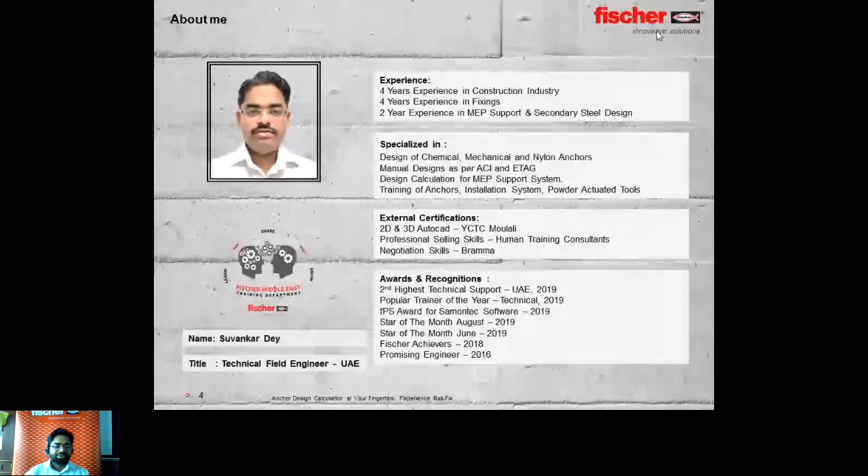So today, what will be our journey? Basically, there are two segments of the journey. One is the basic segment of rail fix. We'll discuss elaborately, and there will be another about the CFIX. Also, we will discuss elaborately regarding that.

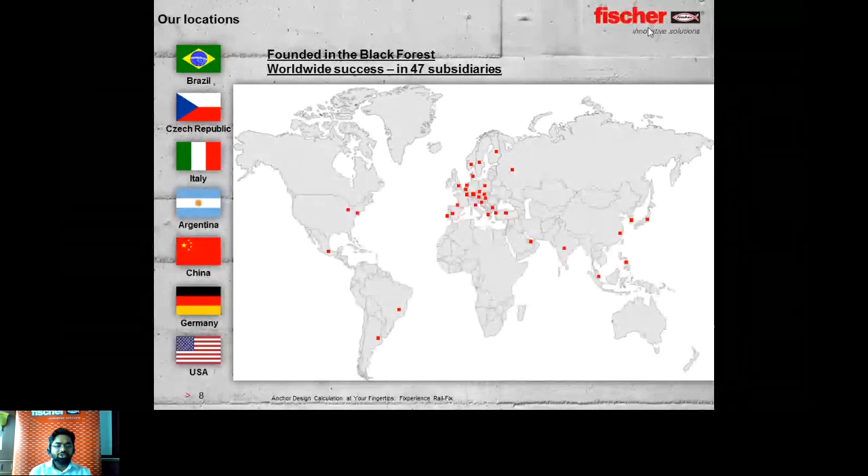Our manufacturing locations are Brazil, Czech Republic, Italy, Argentina, China, Germany, and USA. We are in 47 subsidiaries worldwide, spreading the success over the world now. What are the divisions of Fischer? Fischer has the fixing division, where we work as Fischer fixing. We have automotive systems. We have Fischer Technik, Fischer Consulting, and LNT Automation, also with Fischer.

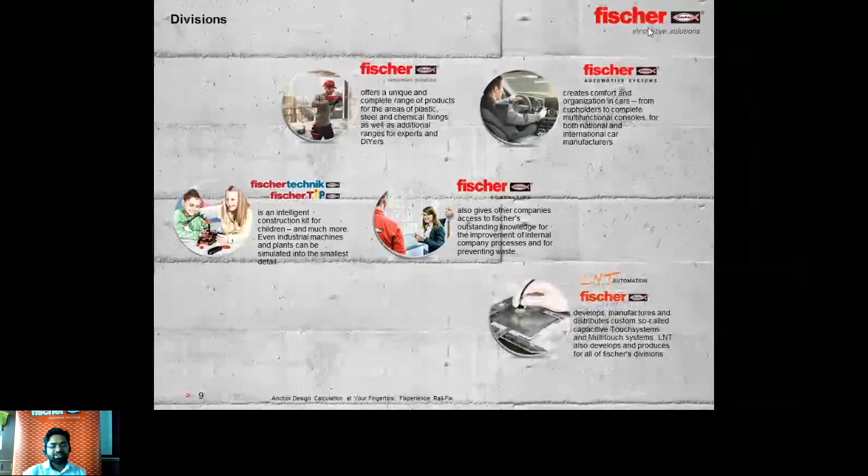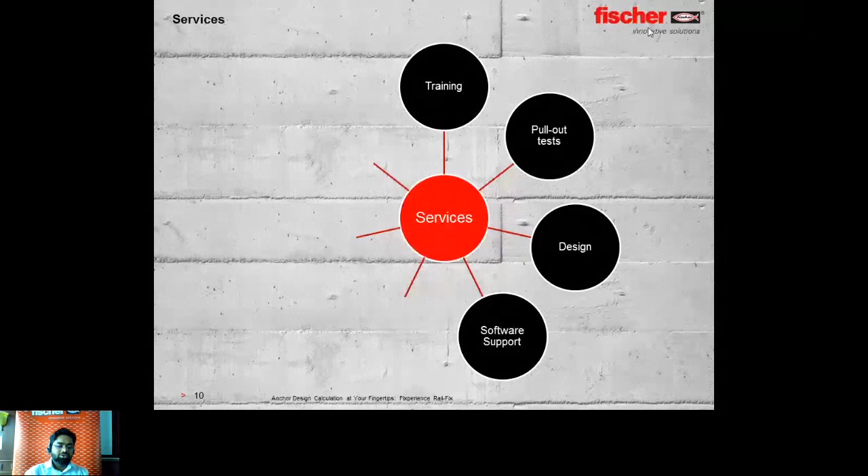Now, about the services, I also want to introduce you. Fischer is not only selling the product, we are also giving training. So if you need training at your offices, or you need any development in your knowledge, we can help you out with trainings about anchors. We also do pull-out tests on site. Design calculation and software support is also given by us. Document support is there, international technical support, as well as project references for you.

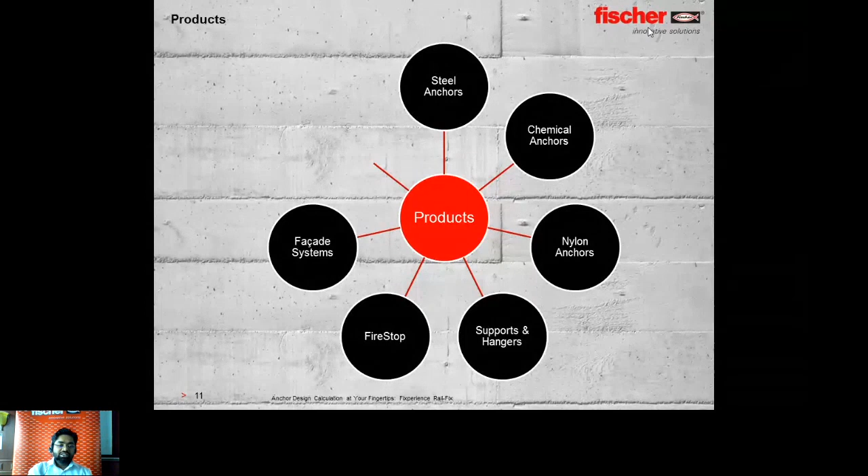So once you click on rail fix, you will find software like this. Today our discussion will be on rail fix and later on CFix. If you see rail fix, it's a user-friendly interface, and towards the left side you will find a toolbox. So how to start the design? You just have to go step by step on the left side, and your design will be done through to the print preview.

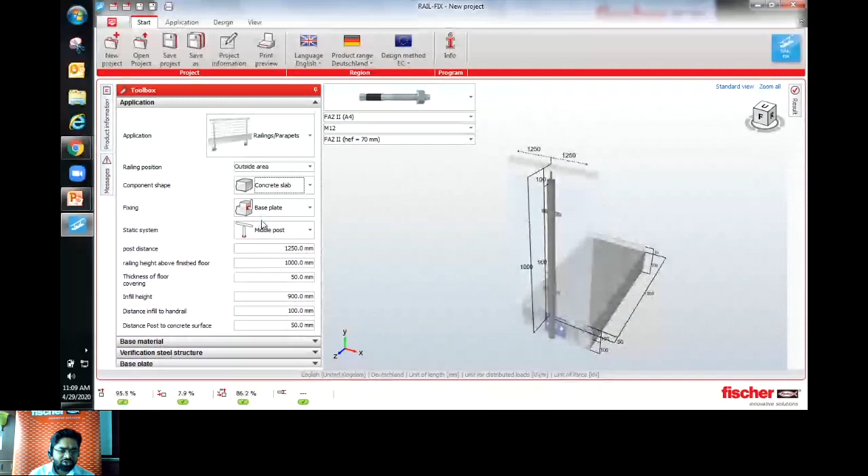What is the component shape? Sometimes at the site you will find they are fixing on the slab, sometimes they have an upstand. So if you do have an upstand, you can choose it. If you don't have the upstand, then go for the concrete slab. Today my example is with the concrete slab.

Fixing is the base plate. How the base plate is fixed, on the face of the slab or on the top of the slab, can also be defined here. I will choose on the top of the slab, and the next part is the static system.

For the post there are different options available in the software: single span element, two span element, multiple span element, and middle post. Middle post is always the worst case, as you know. Single span or two span element can also be chosen based on your requirement. As middle post is the worst case, I'm choosing middle post.

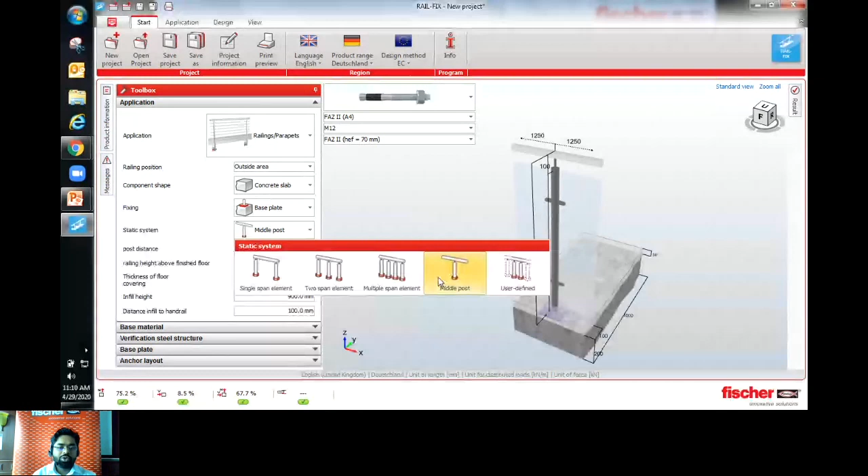What is the distance between the posts? From post to post, what is the spacing? I have the post to post spacing as 1250 mm, so 1.25 meter, let's say. Railing height above finish floor: how much is the height of the railing?

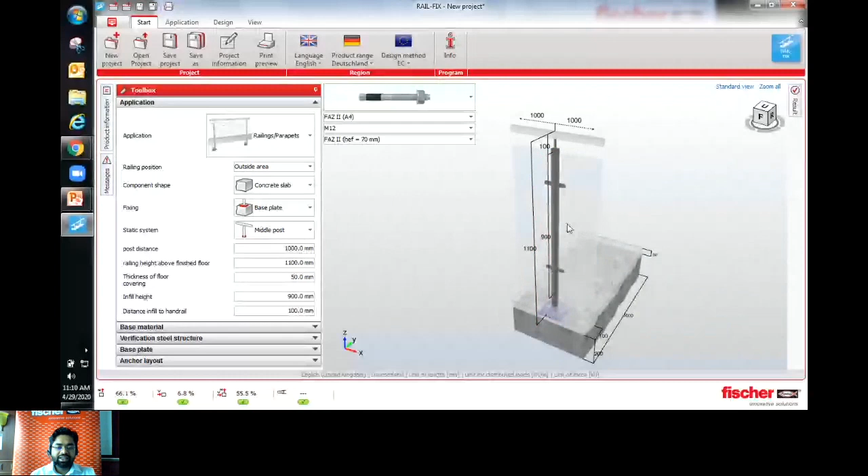By the way, you can directly input the values on the user interface, in the model itself. Let's say I have 1100 mm height, and then how much is the height of the infill? It is 900 mm here, or you can choose from here also. I'll make it 1000 mm. Here you also have the option for the distance from the top of the infill to the top of the rail. All these options are basically architectural requirements, so based on the drawing you can fill this data.

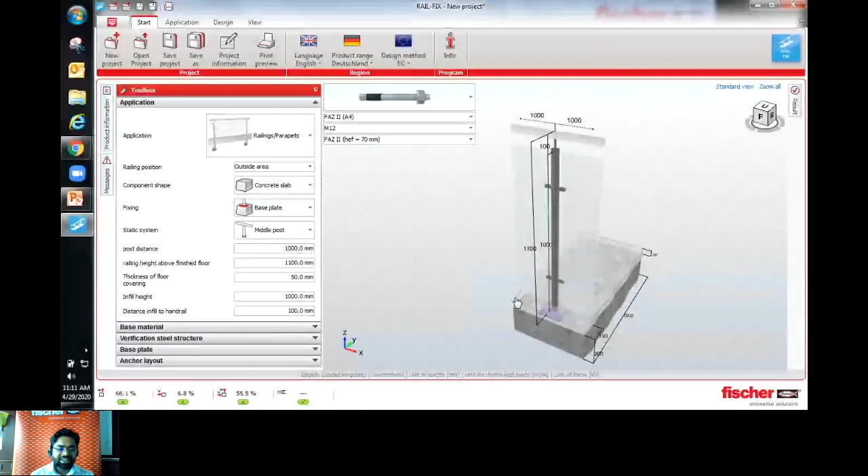Once you finish the modeling, we can come to the base material. What is the base material made of? Is it cracked or non-cracked? Case to case, we can choose cracked or non-cracked concrete. Grade of concrete: which grade of concrete you have. Surface reinforcement: whether we have surface reinforcement or not. That's the information regarding the base material. Once we choose the base material, we are good to go for the base plate.

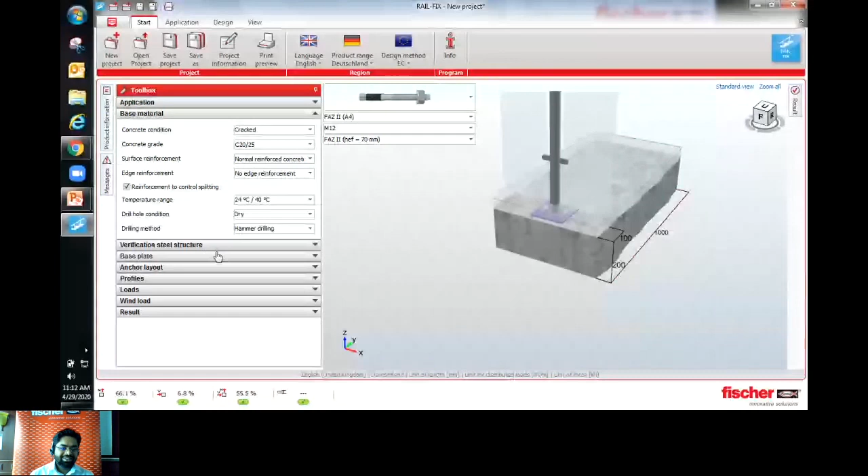Did I miss something? Verification of the steel structure. We will come to the verification of the steel structure once we finish the modeling.

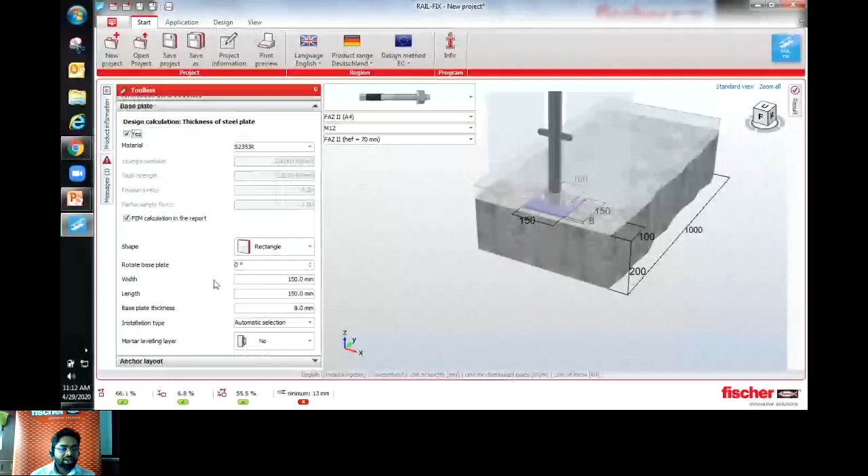Now, the base plate: what does it look like? Is it rectangular, circular, elliptical? If you have a rectangular base plate, you can choose the rectangular base plate here. Here as well, there is a checkbox asking whether FEM calculation, design calculation for the base plate, is required or not. You can include the FEM calculation in the report by ticking the box.

Okay, let's come down here. What is the size of the base plate? It's 150 by 150 now. Whatever size is required for you, you can choose it, and then you're good to go. For the base plate thickness, you can see at the bottom it's saying we need 13 mm of base plate. So I will just change it to 13 mm, and it's showing green again. If it is red, it means it is overutilized. It always has to be in the green zone.

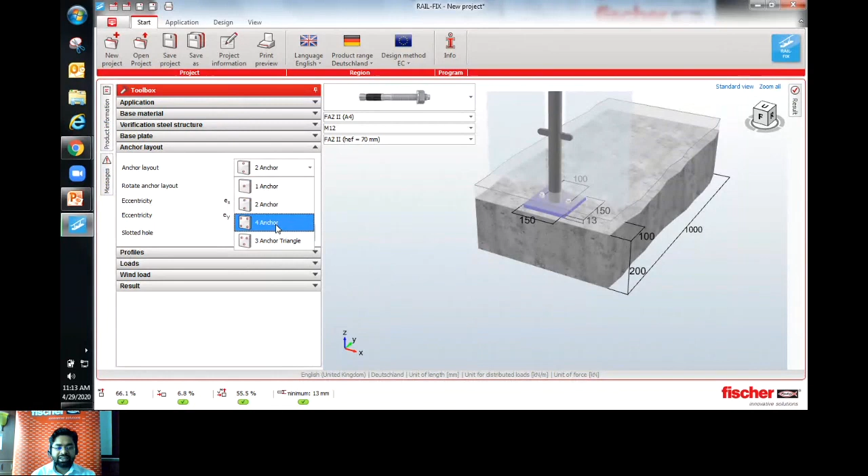So what is the anchor layout? Anchor layout is how many anchors you are putting. It's 4 anchor, 2 anchor, 3 anchor in a triangle, etc. I'm putting, let's say, 4 anchors here. If we are putting 4 anchors, it's saying the edge distance is not sufficient. You can see here, basically we do have edge distance, let's say in the side as like 100 mm from the center of the anchor. I can put it directly here.

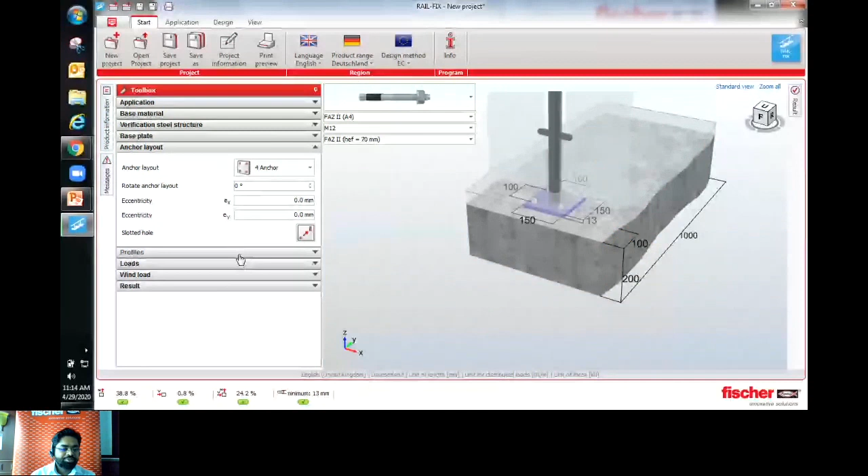Now coming down to the profile, how the profile looks like. We can ignore this part because when we do the verification of the steel structure, we can directly do the calculation from there. It will choose the profile from there. Now coming down to the load, there is option as free input, and the loads are mentioned here. So you can put the unfactored load without safety factor. It will take the safety factor automatically and then do the design calculation.

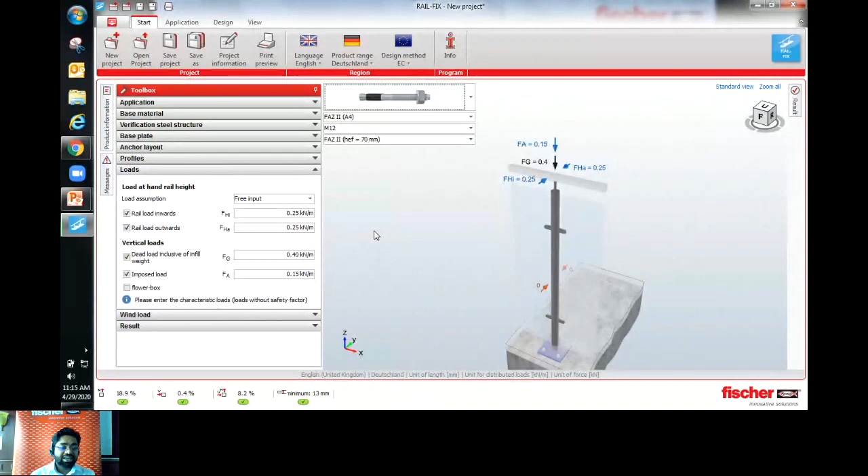So let's say I am having load here as inwards load 0.25 kilonewton, outwards 0.25 kilonewton. FG is basically denoting the dead load of the infill. So here, let's say I am having 0.2 kilonewton, and here it's imposed load. How much is the imposed load? 0.2 again, let's say for me. So this is an example I'm trying to make, and this is how it's coming.

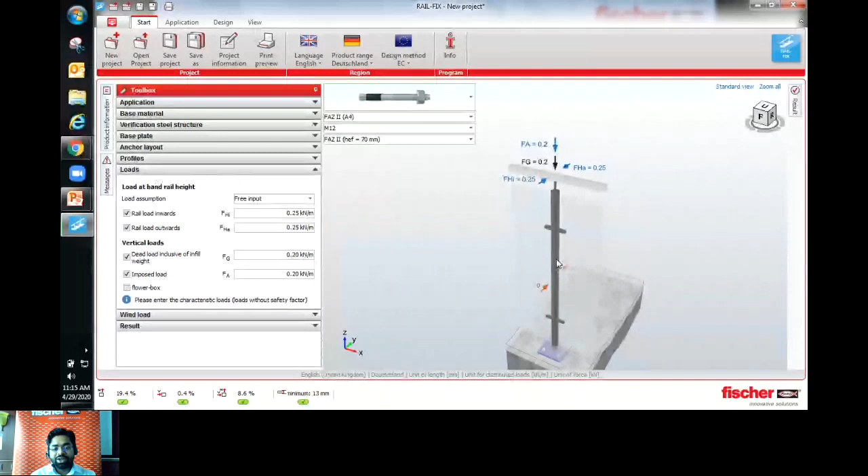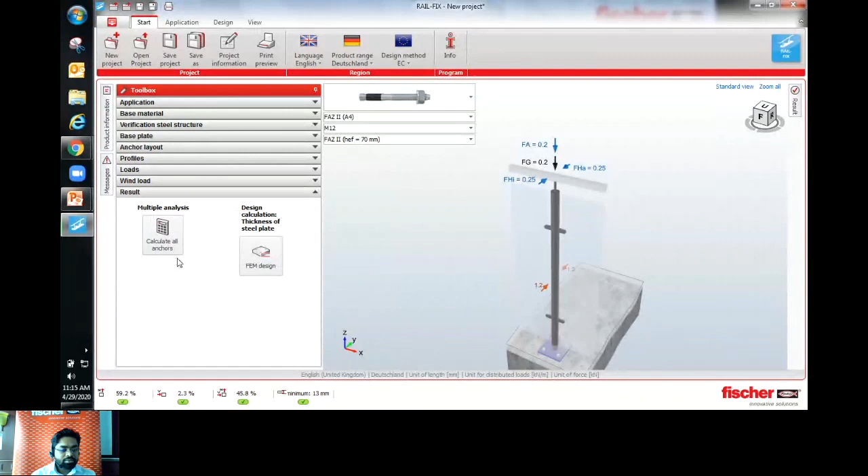Now going to the wind load, we can include the wind load as well as a free input. How much kilonewton per metre square is the wind pressure? So I can put 1.2 kilonewton per metre square in both directions, and good to go for the result. Now there is one thing called FEM design, which is doing the design check for the FEM, finite element. So we can check the finite element from here.

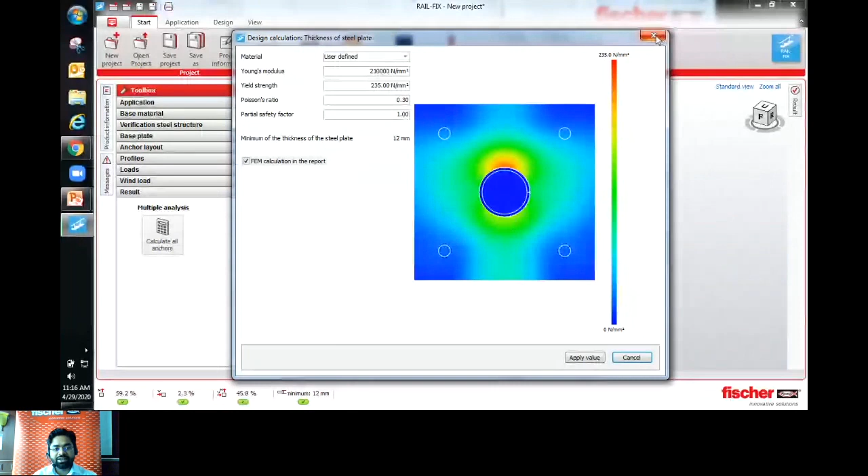What is the grade of steel mentioned here? You can mention it as user defined if it is aluminium or some other material apart from steel. Once we define this, we can do the check here saying how much is the thickness required. It's 12 mm. Apply the value. So now our plate thickness is 12 mm.

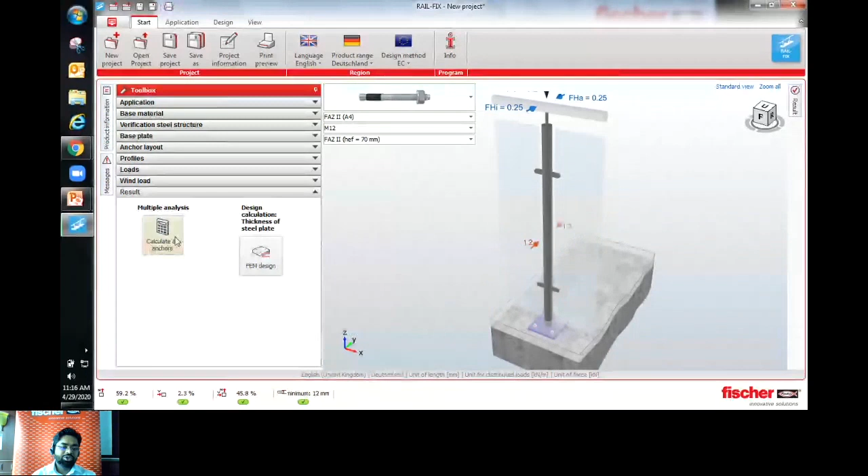Great. So now the question I saw, how to calculate all the anchors. There is an option. We can choose the anchors from here, but I prefer to choose the anchor from multiple analysis. So if I click here, in a single click, you will get the list of anchors that will pass for this particular design calculation. Just to give some time, it's having 743 anchors passing for this particular case, and it will give the whole list of anchors that are passing.

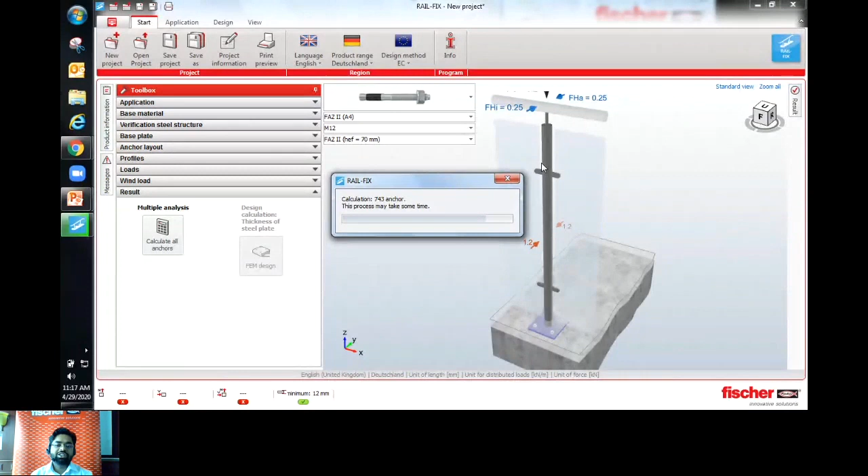I saw one of the questions here. Which load are we talking of here? Basically, we are talking about the loads: what are the live loads, the imposed loads, as well as the dead load of the handrails. It always has certain values from project to project, based on the specification, and how much wind load is there, because it's an outside application as well.

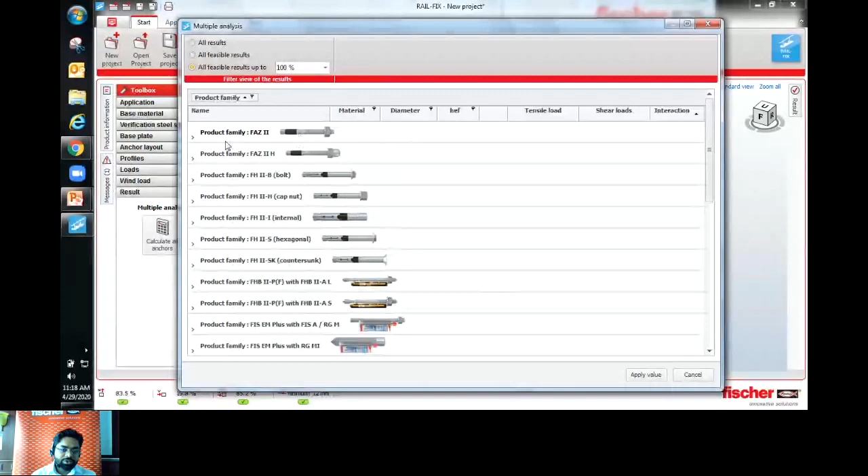Here you will see the whole list of possible anchor solutions. Now it came, so these are the anchors that all pass. I will also tell you today how to do the economic anchor design based on this list. So let's choose one for the time being to make the report, and later on we can come back to how to choose the economic anchor. So now this anchor is FAZ II M10. Great.

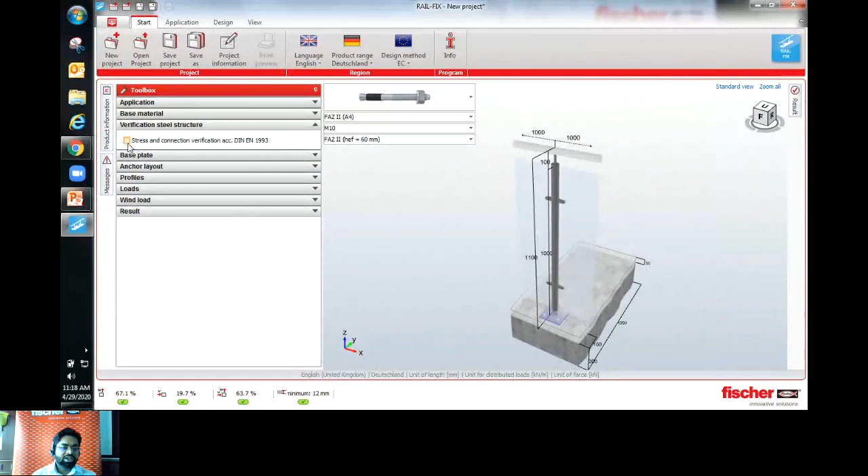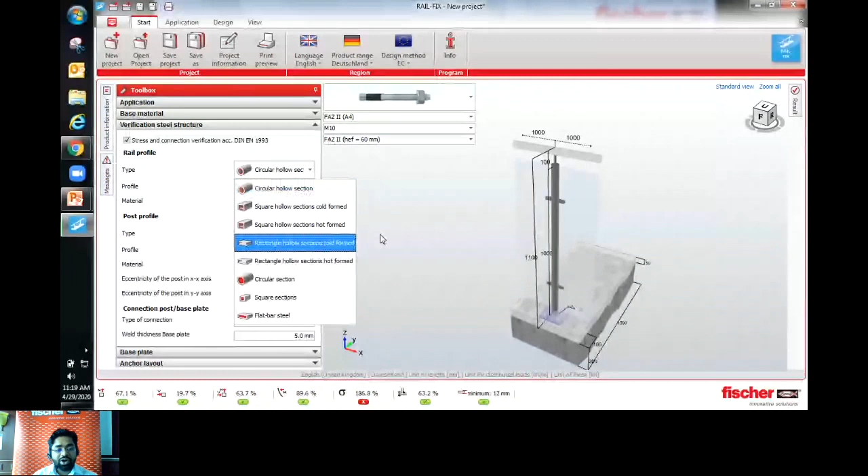Now we talk about verification of the steel structure. To do the verification of the steel structure, we just need to click on this, and it will do the verification of the post and the handrail. How the rail looks like: a circular section, a square hollow section, or a rectangular profile, we can choose. I'm choosing the rail as a circular section, but the post as hollow section. Once we choose the hollow section, I can also choose its size.

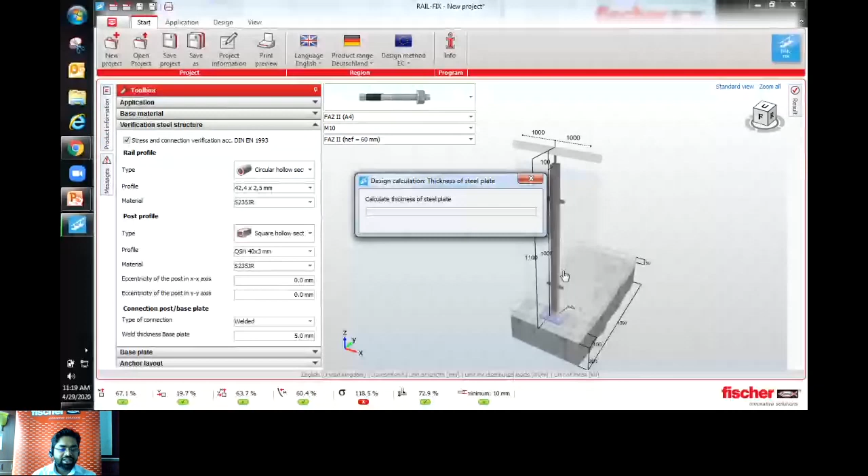Let's say 40. And not only the post and the rail, it's also checking the welding connection. Here you can see the stress is coming much higher. In the stress analysis, the square hollow section 40/3 is not passing. We have to go for a bigger section. 40/4 is passing with exactly 99.6% utilization, you can see. Now it's safe to go. The welded connection is a 5 mm weld with 72% utilization, so good to go.

Here now the print preview is coming. If we click on the print preview, it will give the report. So let's see how the report looks like.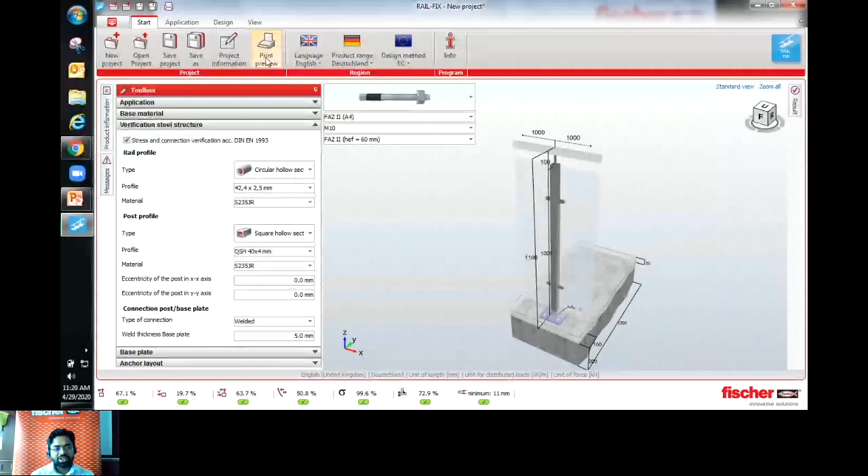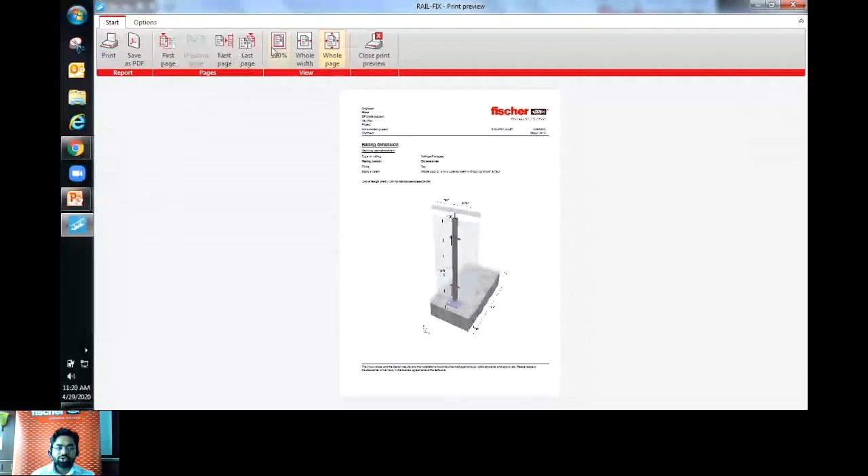Mr. Rajai, I see you wrote how to calculate shear force. Basically, the shear force is calculated by the software itself, so that's why you don't have to consider any. You don't have to do the calculation in any structural software. You can do it in this software and then find it. I will show you how the report looks like. Maybe it will be easier, and then it will answer your question.

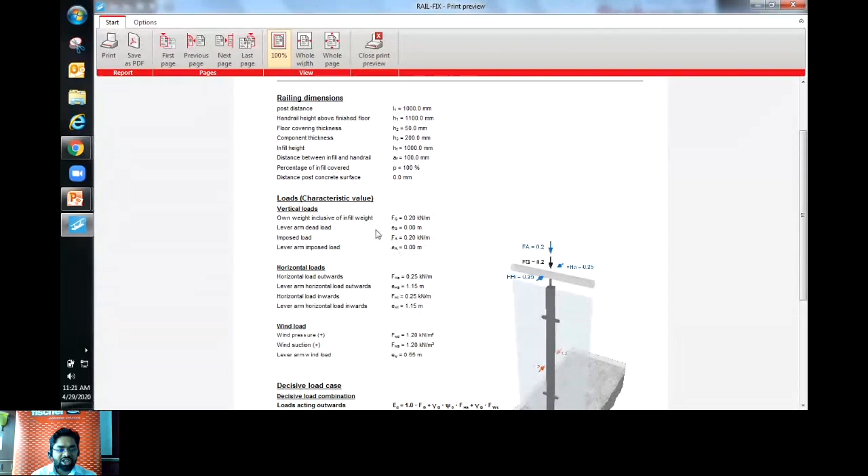So this is how it looks like, it's the basic view of our handrail design. Here, the railing dimension and the post dimension have been mentioned. What loads have been considered is also mentioned. Now, based on that, the decisive load case has been considered. So for the deflection, all values are with 1 times safety factor, and then you can see the load combinations.

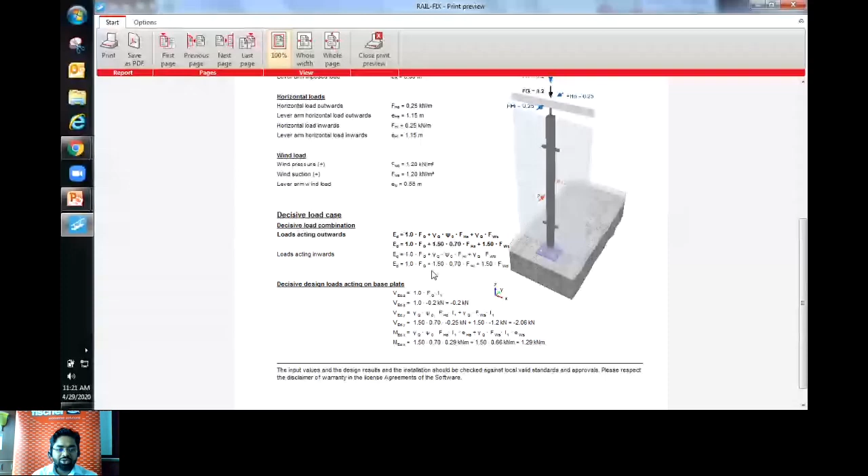Here, the decisive load design is acting on the base plate based on this load combination, and how we are getting the shear load, tension load, bending moments, everything on the base plate. So at the beginning, we did the check for the rail profile and post profile. It has also been chosen, and after that there will be the verification.

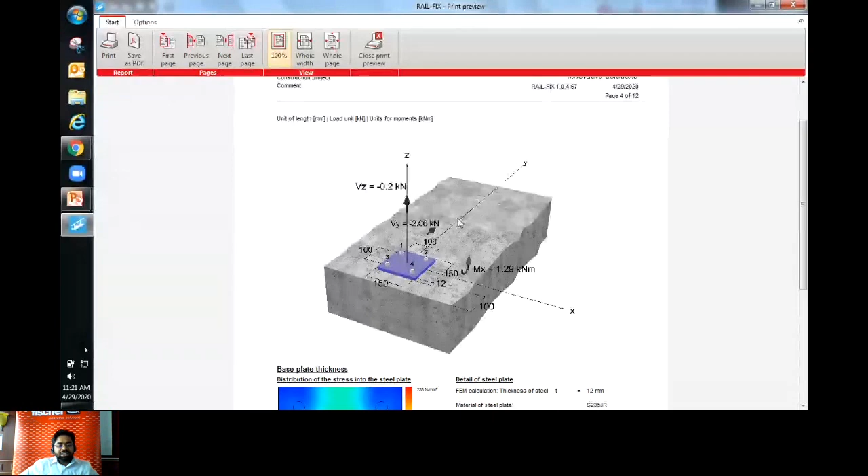So now the anchor design is there. There is the FEM analysis for the base plate. There is the anchor, how much maximum tension force is working on the anchor, and based on that the detailed analysis of the anchor is given.

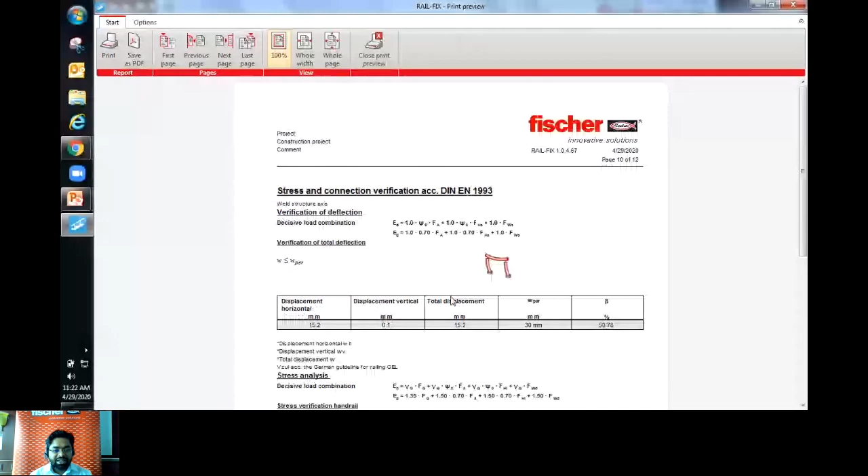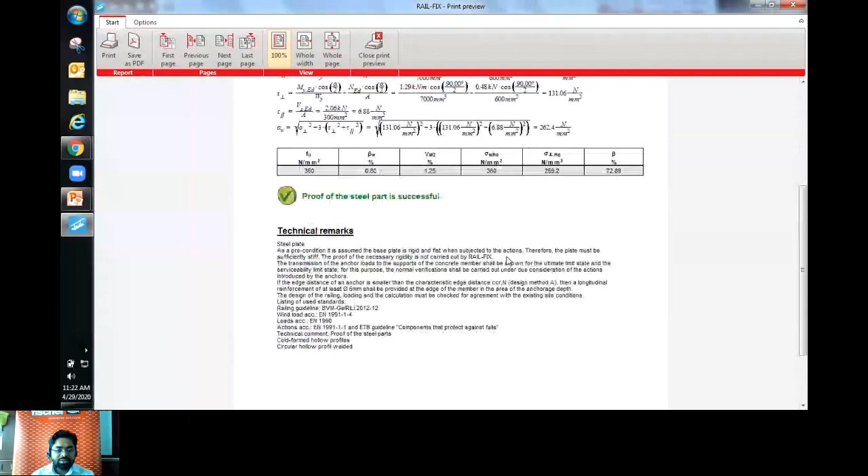Now in the second part you will find the verification of the deflection for the rails as well as for the post. So here the decisive case has been taken again, and then the deflection has been checked and the stress as well. So after this calculation, it's saying proof of the steel part is also successful, and this is the end of the report, you can say. So this is how the report looks like after doing the calculation in RAIL-FIX for the handrails.

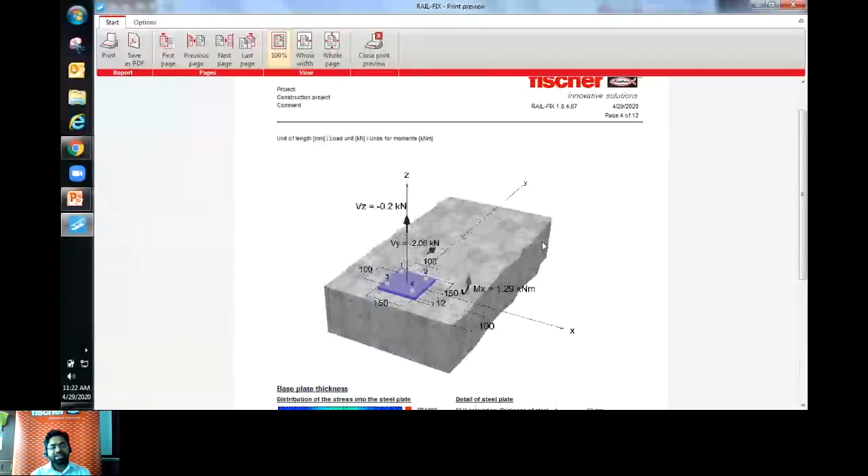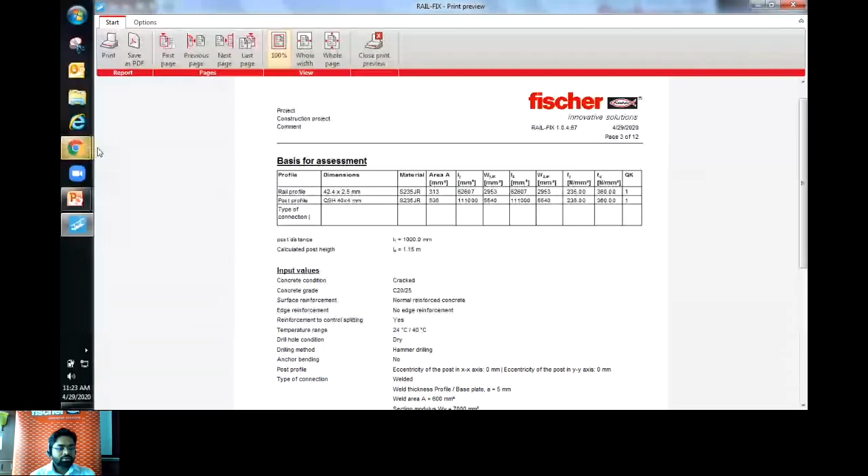So now we talk about RAIL-FIX. It's again about the practice. You can do the calculation, and if you are facing any issue, I am always available. I will give my contact at the last slide, and you can contact me, contact us at Fischer to support you anytime.

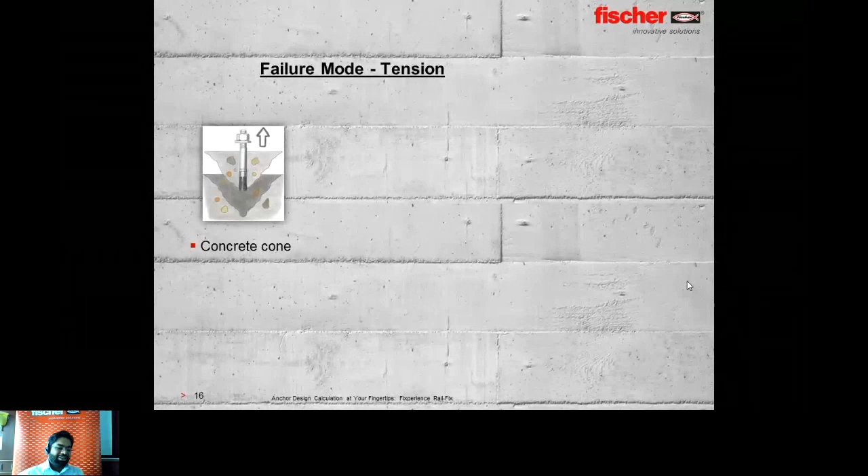So now the failure modes in tension, it's generally two. One is steel failure, another one is concrete failure, but it has different checks. So how it looks like: there is a check for the concrete cone failure under concrete, steel failure as I told from the anchor part, and then pull out failure, again due to wrong installation or the lower grade of concrete. So there are 3 checks for the concrete failure and 1 check for the steel itself.

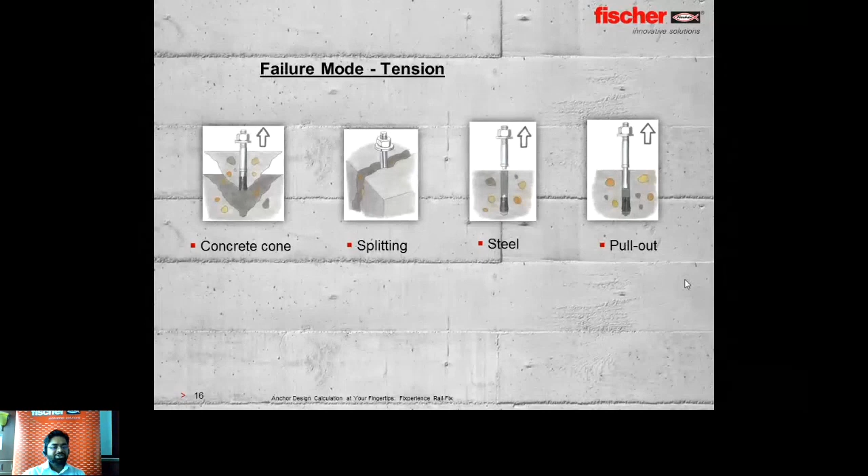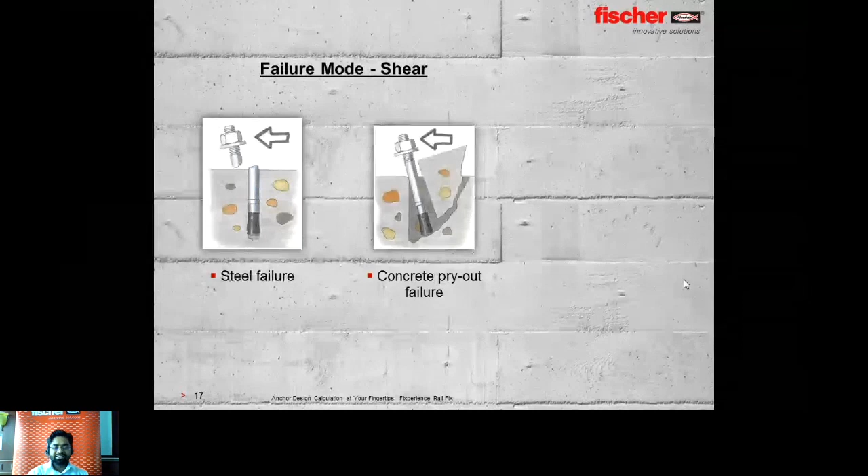Now the failure modes in shear are similar. It's having steel failure, either the anchor fails, or the concrete fails with concrete pry out failure. Omar, I remember you told pry out, it is for shear, not under tension, but great try. Thank you very much for your comment. And there is concrete edge failure as well if the anchor is very near to the edge.

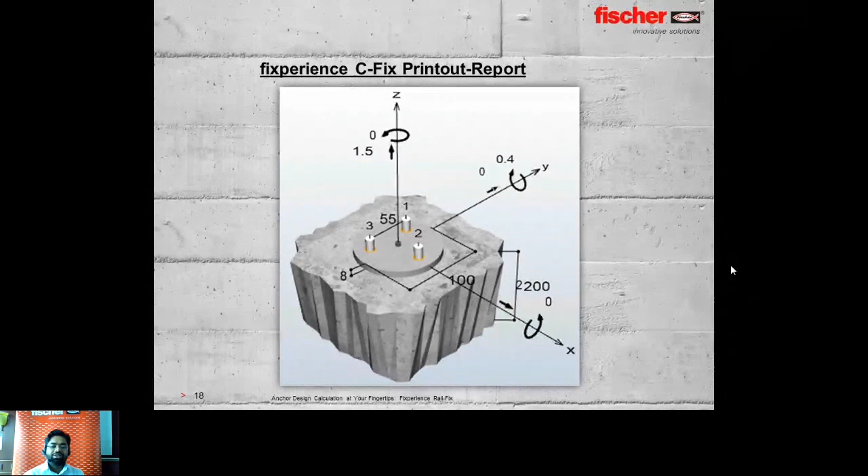Why do we have to know this? Because in the report we find all the words or checks over there. In the fixperience C-Fix printout report, if we enter these loads as 1.5 kilonewton of tension and 0.4 kilonewton meter of bending moment, it's basically giving tension and shear to the anchor. The anchor cannot consider the bending moment working in the base plate. So it's simplified from the base plate to the anchor as tension and shear.

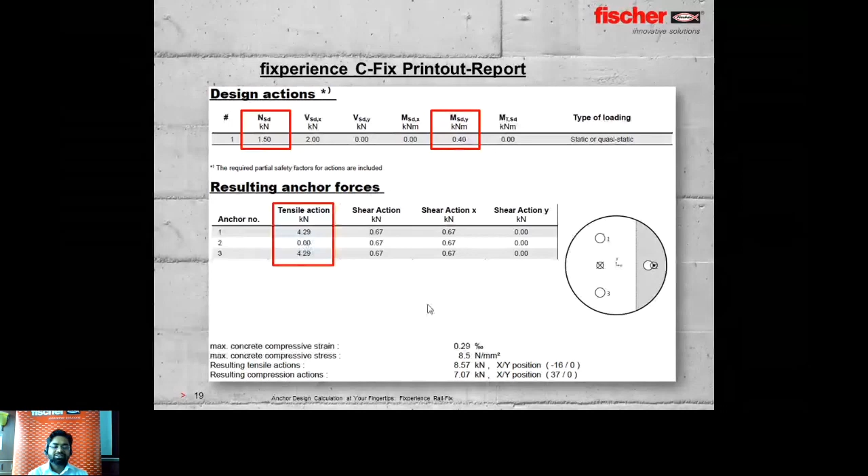So here you can see the worst case is for anchor number 1 and anchor number 3. Also in the diagram, anchor number 1 and anchor number 3 are under tension, and anchor number 2 is under compression, so it is 0. Now in the report, once we print out, we will find resistance to tension load. In this table, you can easily understand the maximum acting load in a single anchor or group of anchors, and the capacity of that single anchor or group of anchors under that criteria.

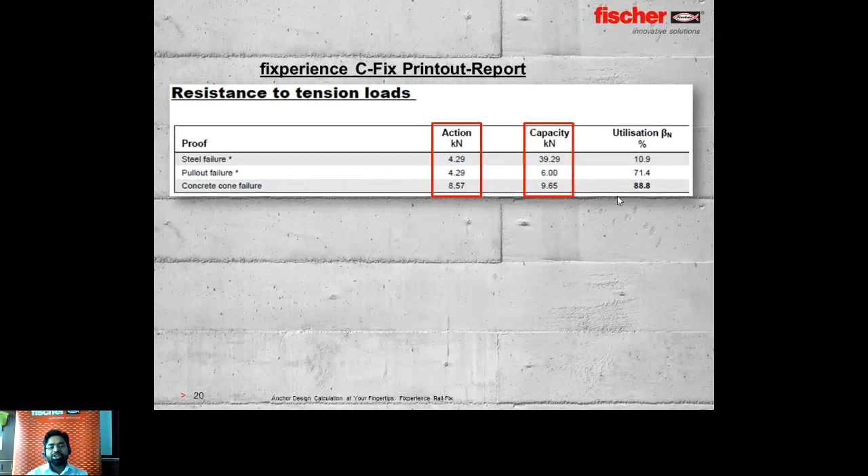So let's take an example. Steel failure, the acting load is 4.29 kilonewton. The capacity of the anchor is 39.29 kilonewton. It's much higher, so the utilization of the anchor is only 10% under steel failure. But the worst case is denoted in bold. It's 88%, the concrete cone failure. Acting load is 8.57 because it's a group of anchors, so 2 anchors multiplied by 4.29. But the capacity is 9.65, so it's utilized almost 88%.

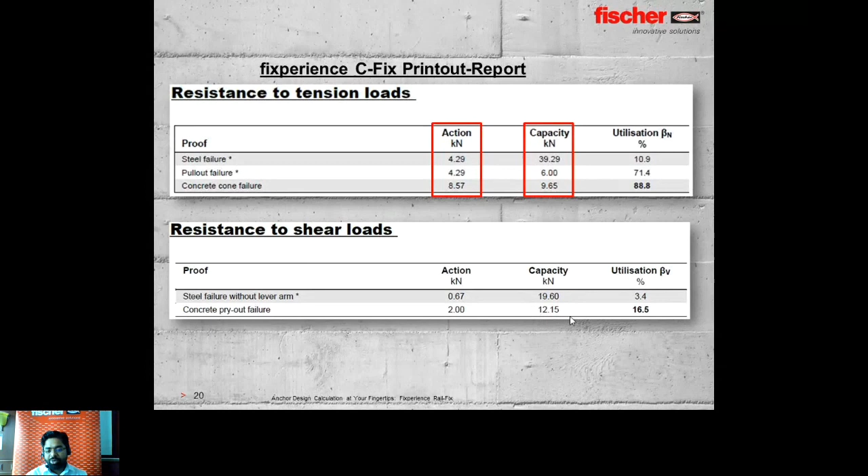Now, coming to the resistance to shear, you will find a similar table before the shear check as a conclusion to see the worst failure happening in the design. So it's again the concrete pry out failure. This is the acting load in the group of anchors, this is the capacity of the group, and then the utilization. Not finishing with tension and shear load, it's also giving the combined failure, which is 88% for the combination of tension and shear.

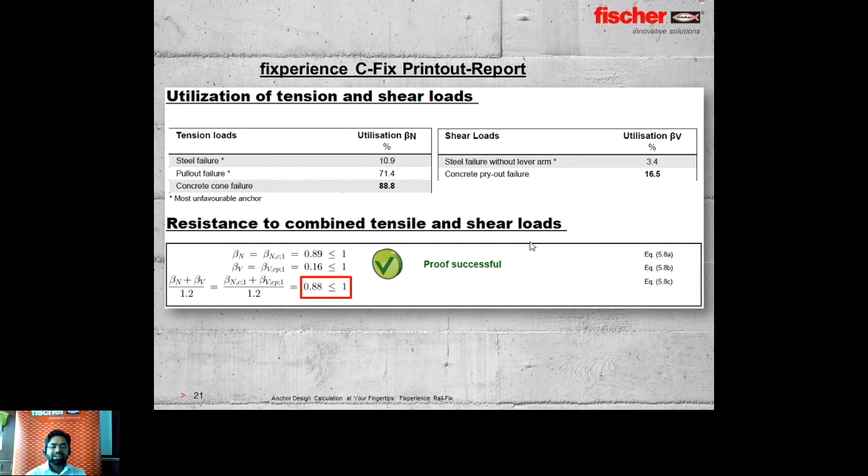At the end, you will find installation data in our report. The installation data tells which anchor you have to use, the diameter of the drill hole, the drill hole depth, and the fixing thickness. If torque is required to install the anchor, if the anchor is FAZ2 or some kind of mechanical bolt anchor, how much torque needs to be provided will also be mentioned in the installation data page.

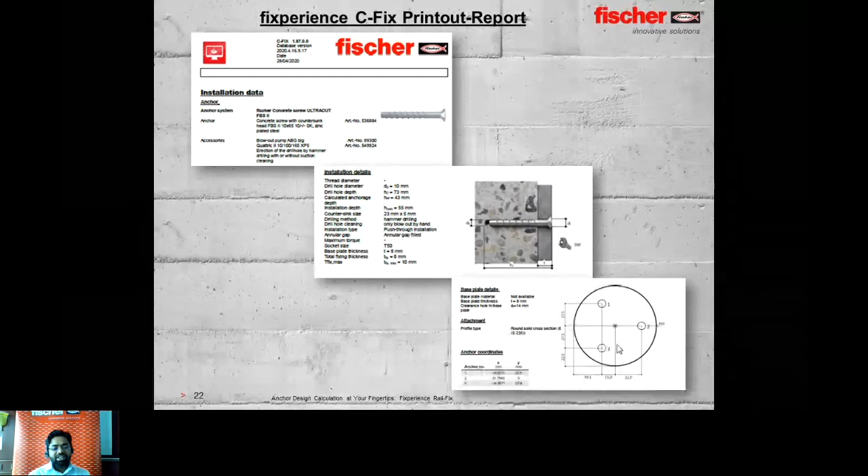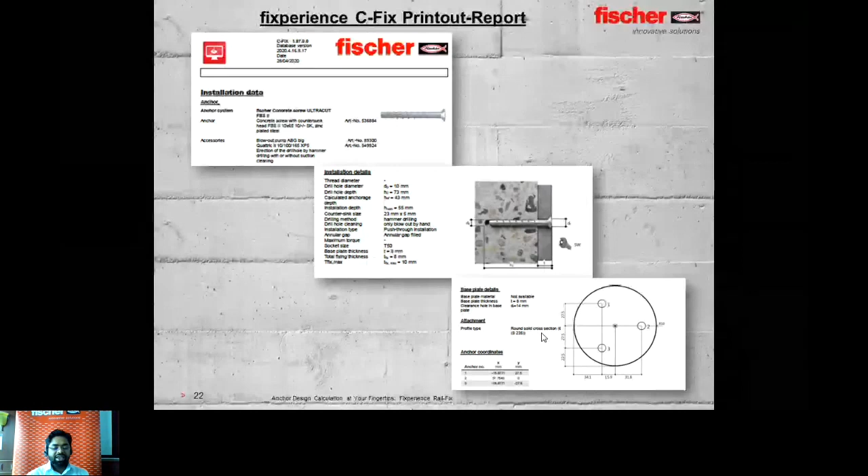Not only that, to make it more valuable to our customer, we are also giving the hole coordinates, where the holes are located, in a table to make life easier to manufacture the base plate.

Now, we heard about ENSO. Do you know what is ENSO? Did you see this before in the design report? I got the question so many times, what is ENSO? So we thought when we are talking about the software, we can discuss what ENSO is, going a little bit deeper.

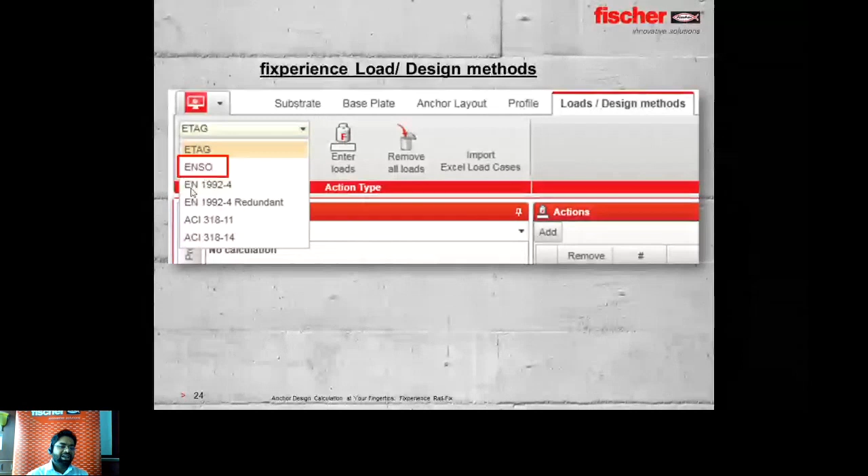Basically, ENSO is nothing else but a code called FIB Bulletin 58, International Federation of Concrete Bulletin 58. It's based in Europe. The history of it: 65 engineers sat together, did research on anchors from different industries and companies, and included it in the bulletin, a technical report you can say. From that bulletin it came to the world, and ENSO or Bulletin 58 is a worldwide accepted method. Now, you could ask why we have to do the design with FIB Bulletin 58.

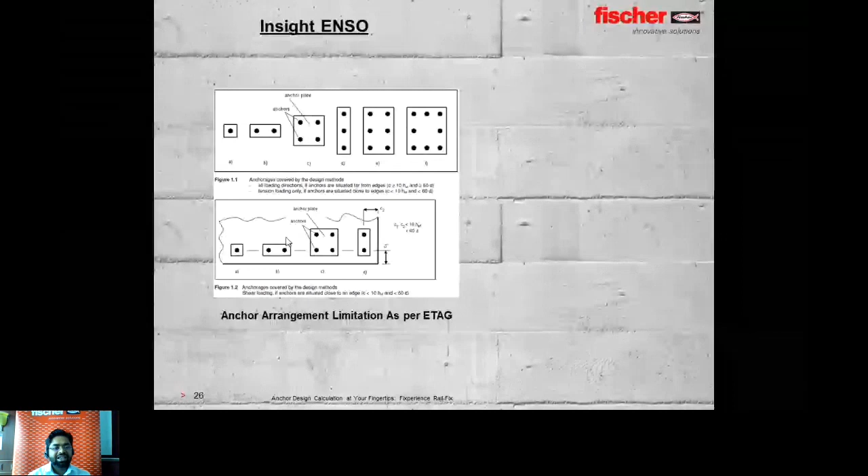Well, if you see in the ETAG, as per ETAG, there is certain arrangement of the anchor in a base plate. So in the first row, you can see how the anchor arrangement can be under all loading directions, and for the shear load, how the anchor arrangement will be. So now, apart from this arrangement, there is no other option in the ETAG design method to give the freedom to the engineers to do various different cases. We might require different kinds of arrangement in the anchor. So ENSO came in with FIB Bulletin 58, which gives unlimited arrangement to the engineers to do the anchor design.

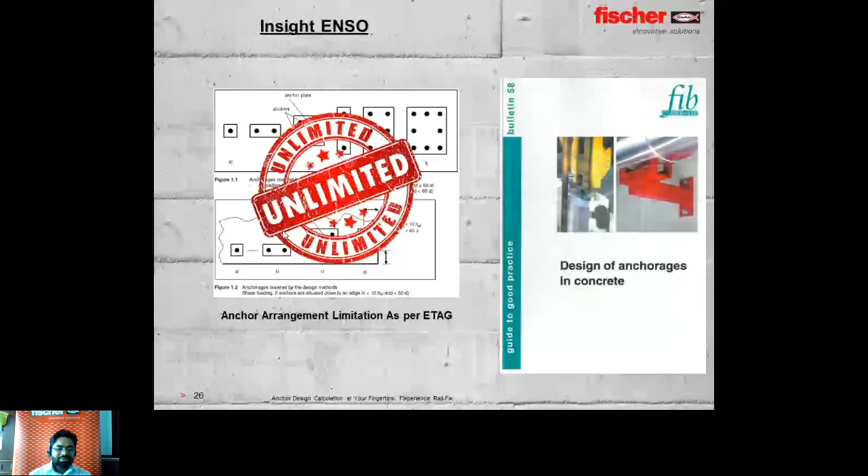Here also another point, why ENSO? Because when we do the design calculation based on ETAG, we get the combination, something looks like this, as I showed in the previous slide. So in this combination, you will find there is maximum utilization for the concrete pull-out failure with concrete cone, and there is steel failure with lever arm. So here in tension it is failing in concrete, in shear it is failing in steel. Now when we come here, the combination is done with the two worst cases. So one in tension in concrete, one in shear in steel. So steel to concrete combination has been done here, which is much more conservative but a bit less practical.

To make it more practical, ENSO came up with FIB Bulletin 58 in the technical report. A group of engineers made this. You can see the yellow highlighted is the steel failure under tension, steel failure under shear, and this is the combination. There is concrete failure under tension, concrete failure under shear, and this is the combination. This makes the design more realistic as per the site, and this is how ENSO is doing the design.

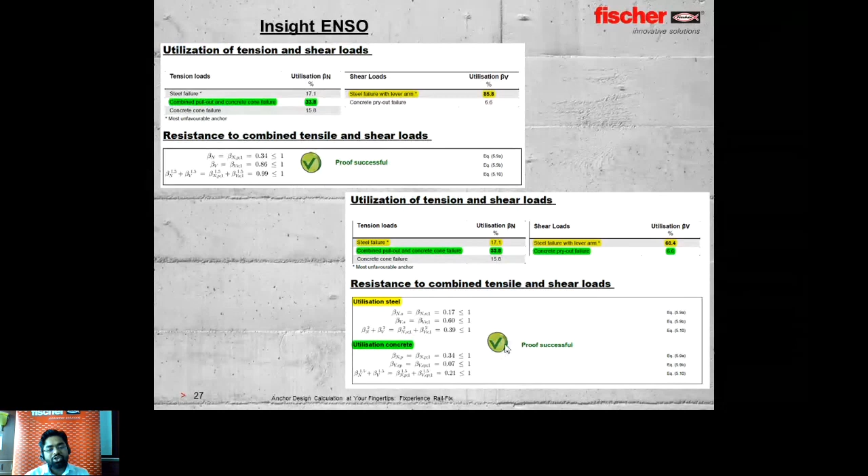So sometimes you will find, when you are doing design with ETAG, it might be failing, but with ENSO it is passing. So with ENSO, it's passing not because there is something behind it. The theory behind it is only the combination of the failures. So ENSO is worldwide accepted, and ENSO is good to go. FIB Bulletin 58 is accepted by groups of engineers worldwide.

Now, also the last but not the least topic for us, how to do economic anchor design. Many times I face this question from engineers in our industry, asking how to do economic anchor design while doing the anchor design in the software. First of all, I just want to highlight a few points regarding the influence factors for the price of an anchor. It's basically the range of products, how many products we have under that category, and what is the load capacity of the anchor. The higher the load capacity, the higher the performance, and obviously the price goes higher.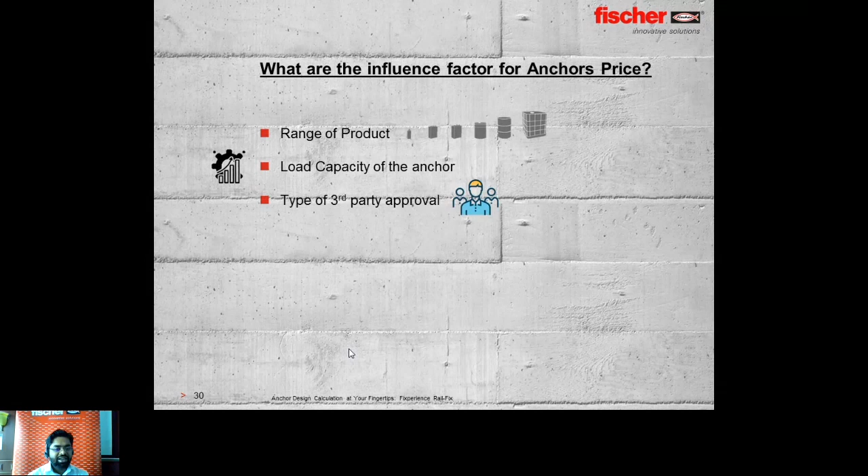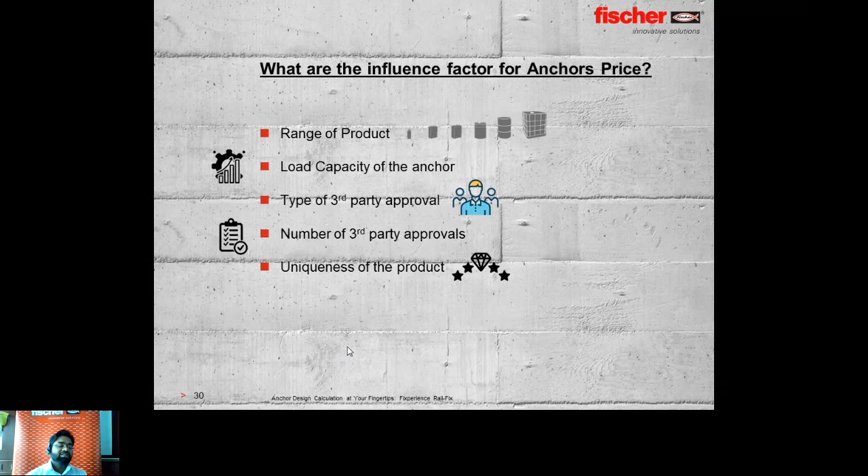Type of third party approval: is it for non-cracked concrete, cracked concrete, or is it a seismic approval. Based on that, the number of third party approvals, what third party approvals we have, ETAG, ICC, and so on. Uniqueness of the product, how unique the product is, how much of a problem solver the product is, if nothing else works, how the product performs, is also a factor for the anchor price.

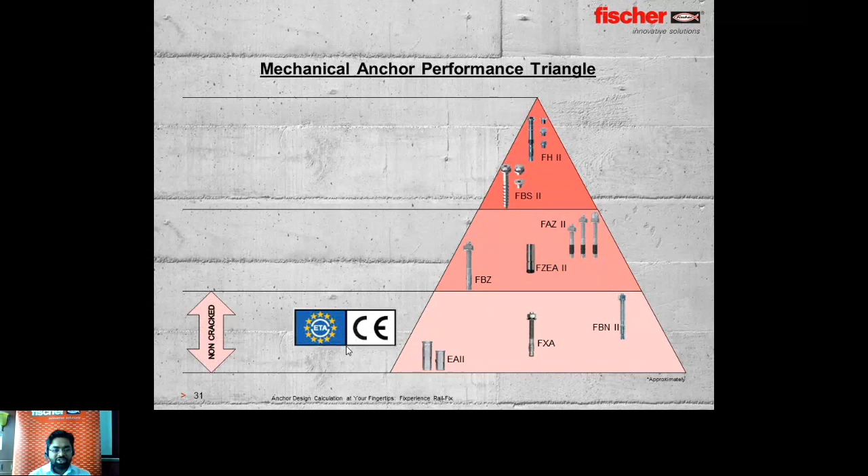Here I try to make a triangle for your ease in understanding how the products can be sorted based on price and performance. So performance is basically directly proportional to price. Hence you can see one by one how it looks. Here the anchors are for non-cracked concrete approved by ETA. As we go up, we have ETA approval for cracked concrete, ICC approval, seismic approval, and at the top you can find the products which have all the approvals along with some special approvals as well. Basically the performance curve goes from bottom to top, so the top product is the best performing product.

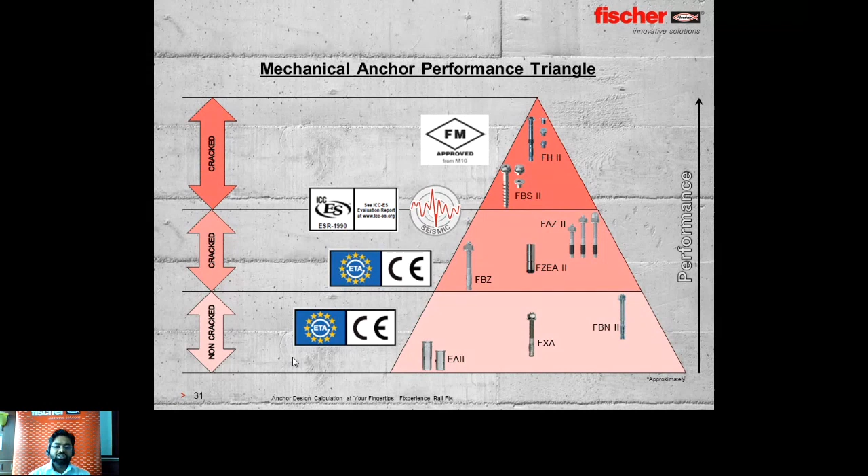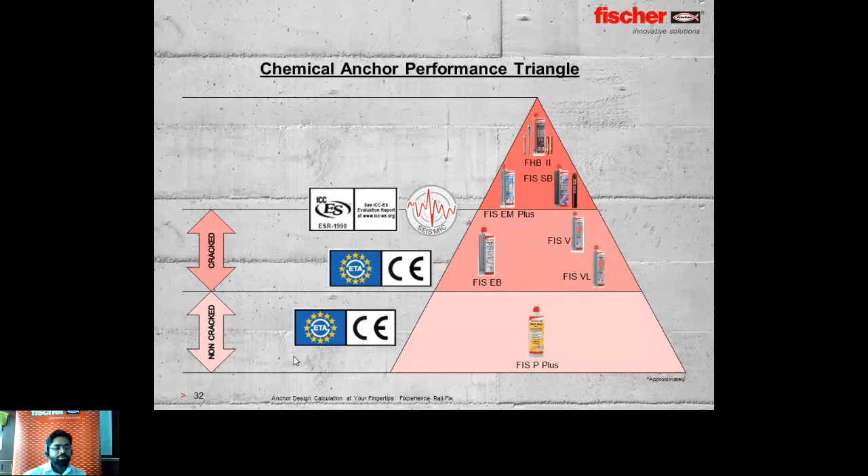Here is the chemical anchor performance triangle for your ease in understanding while you do the design. Here is the approved non-cracked concrete chemical anchor, and this is the cracked concrete chemical anchor having ETA approval. Some of the products have ICC approval, American approval I mean, and then there are also products which have dynamic approval as well as seismic approval. Again, performance-wise it goes from bottom to top. The top product is the best performing product.

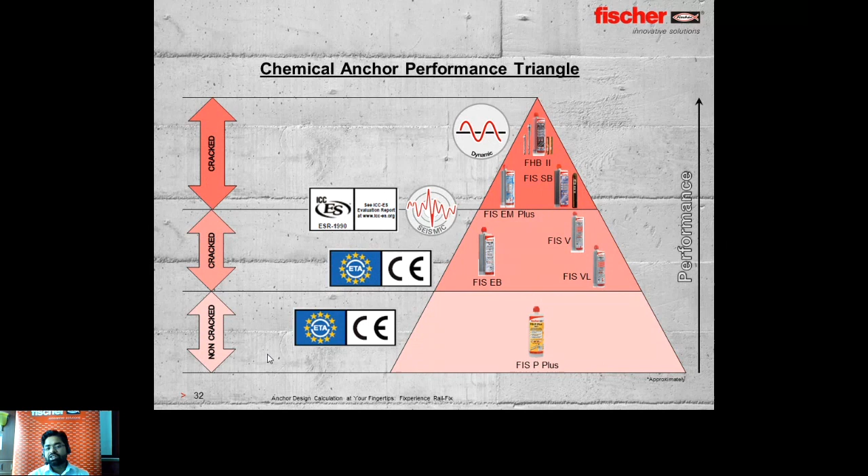Here is how it will help us. You remember in the Rail-Fix we choose calculate all anchors. When we click on this tab, we find the list of anchors and then we can choose, case by case, which anchor is passing for us. So in the result we need to click calculate all anchors to get the list of the anchors.